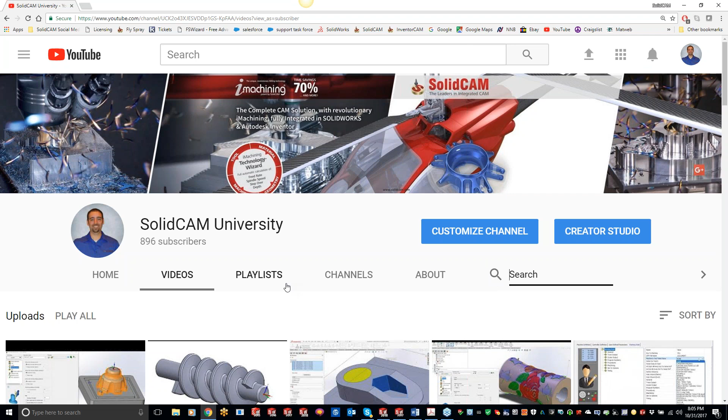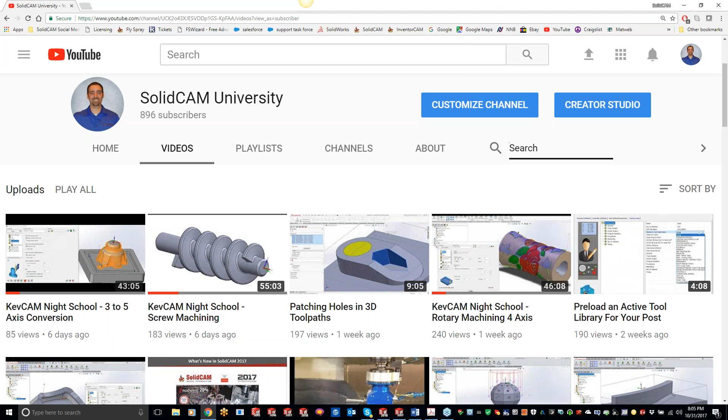But tonight we are going to be covering port machining. Port machining is a really great module, specifically designed for doing ports at funky angles. The nice thing about port machining is that it takes into factor that we're trying to get down as far as possible in here. So the 5-axis control is going to take over all the control for you guys, taking a lot of the guesswork out, and it's going to get that lollipop cutter in there as deep as it possibly can, and then we can come in from the other side and finish it off.

Now, before I get rolling too far ahead here, I want to throw this out to all you guys that are watching right now.

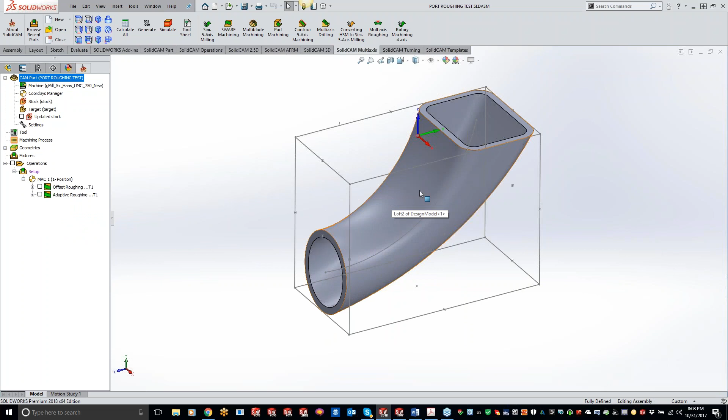To give you a good example, let me open up this file here - another port machining part. I want to show you the difference between offset cutting versus adaptive. With this one, we're doing the offset cutting right here.

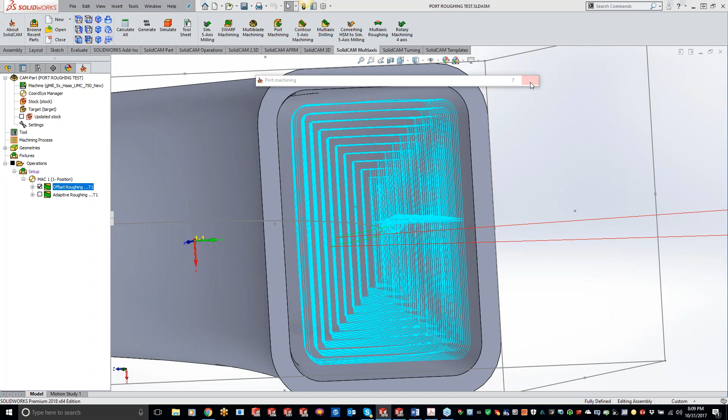If I get some straight-down toolpath view, lined up a bit for you, you can see it's doing the traditional standard pocketing - starting in the center and slowly working its way out, taking its pass, moving over, working outward like a traditional pocketing operation. Now with adaptive, there's a lot going on because we have a lot of toolpath shooting through the entire part, but you can see it's doing a spiral, starting in the center and working its way to the outside.

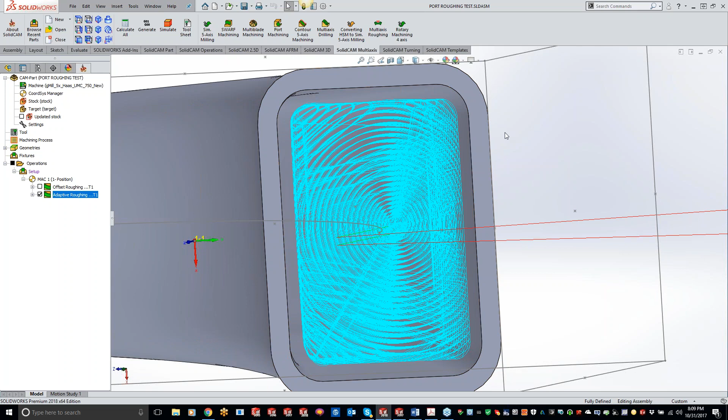What it does is factor in once it hits a higher angle of engagement, it automatically switches over to that trochoidal motion - you can see it in the corners, coming in and doing that trochoidal movement. That's the big difference between adaptive and offset cutting.

Now with the part we're running right here, our ports are actually pretty small, taking into account the size of our tool. So adaptive or offset cutting really didn't make much difference for this particular toolpath, just because we didn't have a whole lot of material given the size of the ball end mill or lollipop cutter we're using.

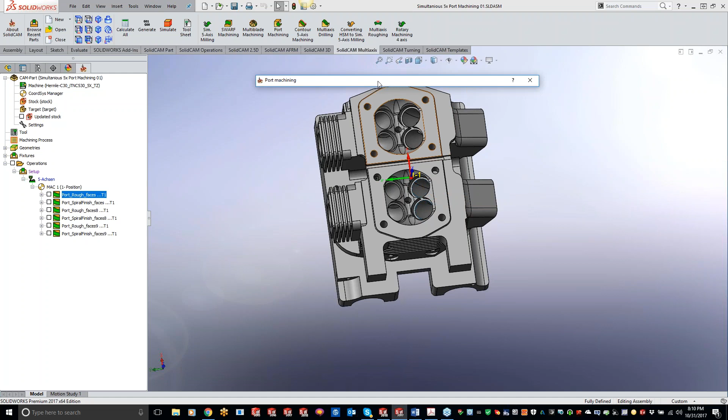So once you pick the strategy that you guys want to use, let me continue on with this. We have roughing, then we can do a rest roughing. We can start off with a larger end mill, come back and do a rest rough, and it's just going to clean up whatever the remaining stock was.

We can do a spiral finish, and we'll actually be using this one, or we can do a plunge finish. Now, the plunge finish is going to be a little bit different than what you're thinking of, just doing a kind of plunging it out, like what we've seen in pocketing.

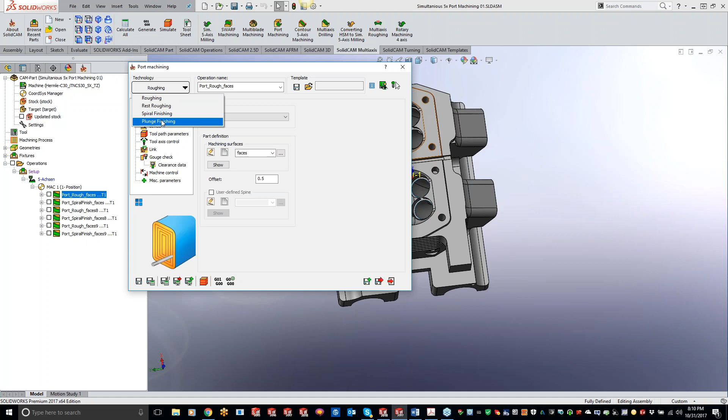I think HSM also has some plunging features. What the plunge finishing is going to do is, instead of coming in here and doing a circular pattern, it's going to do straight lines down, kind of working its way around, doing straight lines going through there.

So it's kind of more of a long contour versus going around, if that makes sense for you guys.

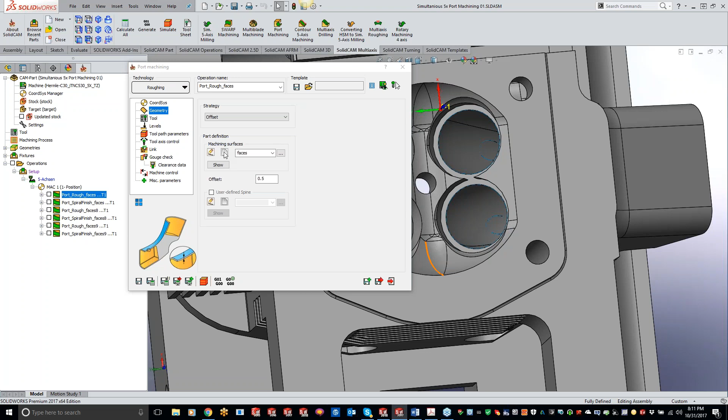Now, the machine surfaces. Think of, we've been working with HSS, we've been working with 5-axis for the last few weeks here. Think of your machine surface as your drive surface. What surfaces do you want to cut?

So for this particular one, what I actually did is broken this up into different surfaces. You can see right here, this surface actually continues all the way up. But what I wanted to do is break it up so I can get a good portion of it on this side, and then come from the top and get another good portion of it. So I just did a surface break in there.

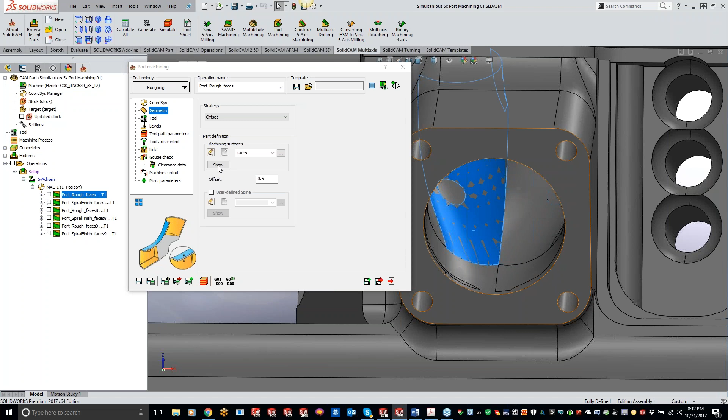If I come in here and do select other, you can see I got my surface break right there, grabbing that surface. I'm going to do a show on here for you guys, but it's a little tough to see because I got two surfaces kind of overlapping each other. So what we're working on is this area right here, as it starts to taper off, up to that section point, and then this front area face right here.

So with any roughing strategy that we do, we can put in a wall offset. This part was programmed in metric, so we got 0.5 millimeters as a wall offset, if you would, since we're using a roughing strategy.

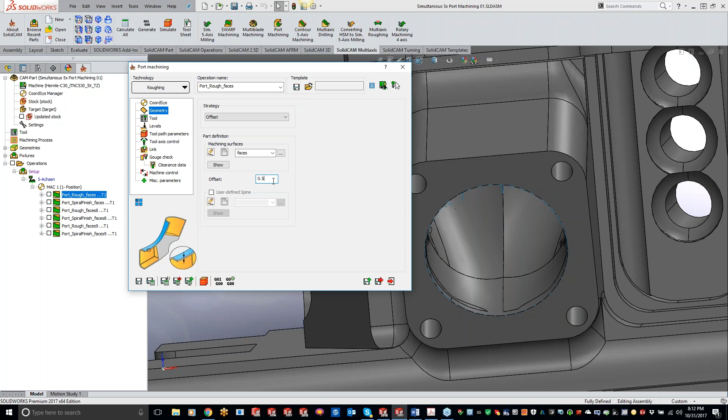Using a 16 millimeter lollipop cutter, nothing really major there. Like I said, when you guys go to select tools, you're only going to get two different options. We got a lollipop cutter and a ball nose end mill. Those are only two options in there.

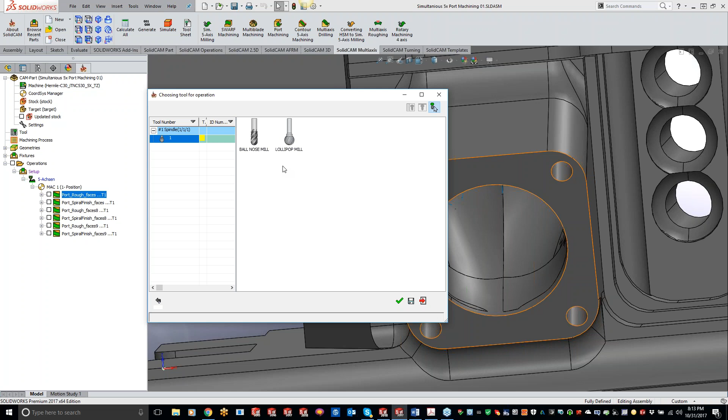I'm trying to get them to add in there the straight flute end mill just for a roughing strategy. They're trying to put that together as we speak, trying to get the ball rolling on that, just so we can have a little bit more aggressive roughing tools to get in there. But with that adaptive step over, it takes out a lot of the hard work on that cutter, especially if you're using a lollipop cutter.

Okay, levels. Same as normal, we're just doing parallel to X. Got a cylinder with a radius, so not really much we have to change in here. This is actually just default numbers that I've chosen in there.

Toolpath parameters, pretty much the same thing as what we've been seeing for the last couple months here with HSS and 5-axis. You got your step over, so we have a 5 millimeter step over. We also have a step down, so stepping down into there, we can kind of fine tune that tool path just a little bit more.

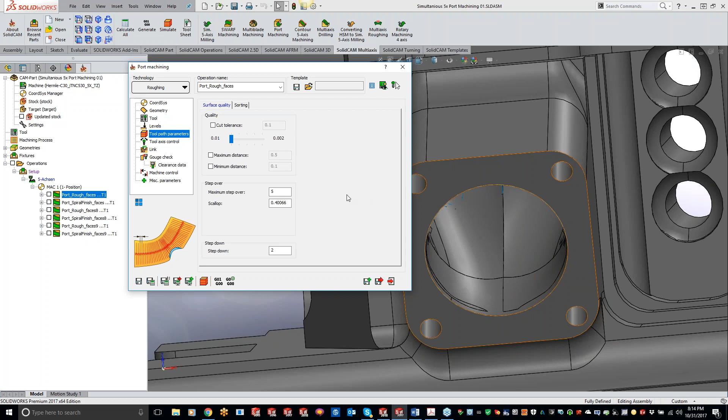Now, where we get into the good side of things is on the sorting. Let me kind of get this part panned around for you guys here. If I'm talking too fast, let me know.

So the output type, do we want to work on the bottom, which would be the bottom of that port? And it's all related off your coordinate system. If you think of up on the top is going to be your top port, and towards the bottom of the coordinate system, this is going to be your bottom port. Same thing, if I go back to this part right here, you'll see this would be the top portion of our port, and this would be the bottom portion of our port over here.

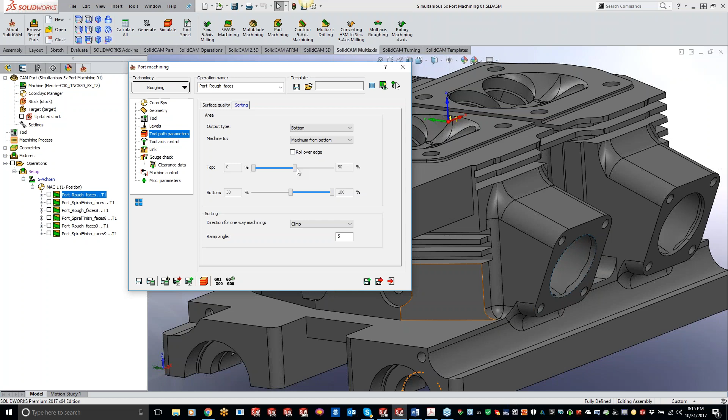So we want to start at the bottom, and so here's our different options. We can do both, from top and bottom. We can do the top, or we can do the bottom to get this bottom cleared out. You also have the option to do a rollover edge. This one honestly I've never really used before, and the only reason why is because I've told it to go 50% past my top. So as it's going in there with my little section that I sectioned off here, I'm telling it to go past that by 50%.

So with the machine to option here, I can do up to a midpoint. I can do maximum from top, so it's going to go in there as far as it possibly can without hitting the shank on the port. Or I can do the maximum from bottom, or we can do user defined, and you can just tell it how far to go in there. But for this one, we're actually going to do maximum from bottom right here. We got your cut direction. You guys can put a ramp angle in there if you want.

Now, I hate to do this, but completely switching tracks right here. For those of you guys that use simple 2D profile, when you use the helical feature in there, you'll notice that we just have a step down. We don't have an actual ramp angle. Would you guys like to see the option for a ramp angle or a step down value? This came up end of last week, and I've turned it in, and they've asked if customers would like that or just leave it the way it is. So I got a couple of yeses in there.

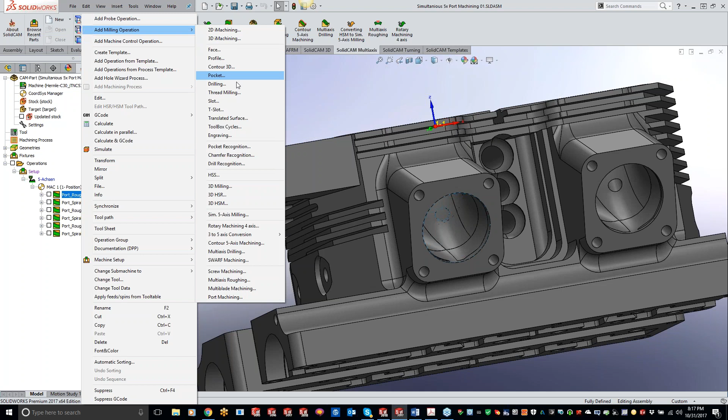So like I said, I apologize, this is completely off subject here, but for those of you that are curious what I'm talking about, let me just add a profile operation. If we go to technology, you can do a helical option right here. And then the only way to set the helical is the step down. So if you do 100 thou, for every revolution it's going to go down 100 thou, but you have no control over the angle. So what we're thinking about adding in here is a little checkbox to do an angle instead of a step down.

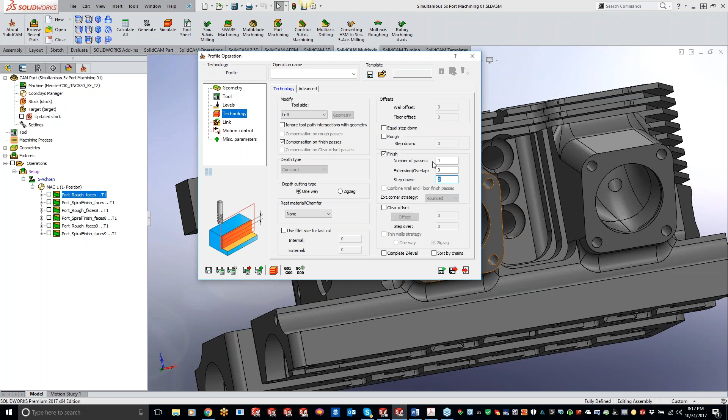So yes. Okay, I got quite a few yeses in here, so we will get those added in there for you guys. And I'll even add a yes to the vote there. It sounds like a nice option to add. Yeah, and like I said, guys, we want to make SolidCAM the best use for you guys. This came up from a customer. Want to get that implemented, and want your feedback on that too. So we will be adding that in there.

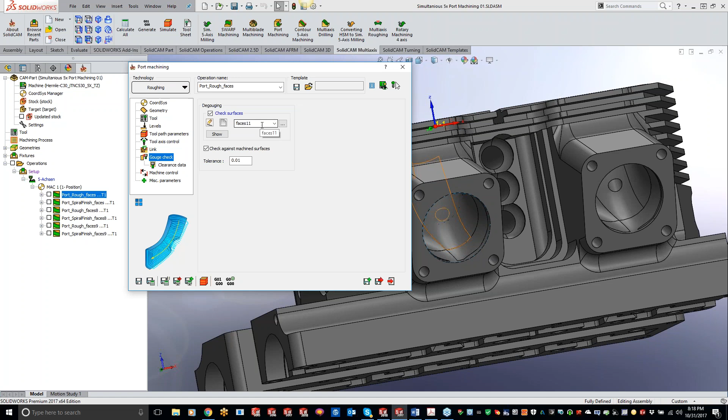Okay, so we were under the sorting. So I'm telling it to start at the bottom, go maximum that I possibly can from the bottom. Tool axis control, not much in here at all. It's taking all the guesswork out for you, and it's basically going to keep that tool in there so it's not going to gouge against the wall. And that's where we come into the gouge check here. I'm telling it to not gouge into any of the faces, but I can also do check surfaces. If I do check surfaces, I'm telling it not to go into these surface areas up here, because I want to come back and attack that from the top side.

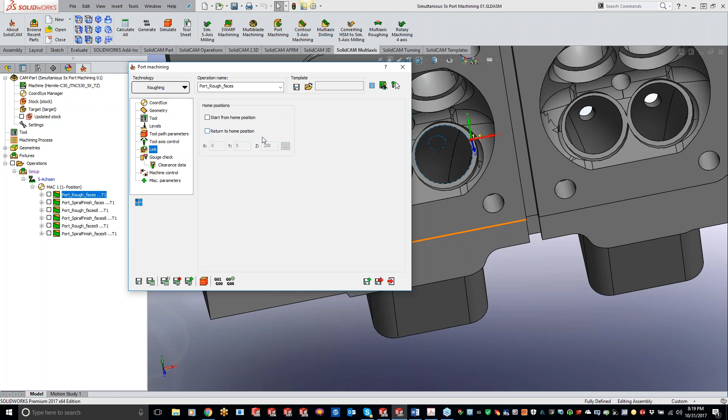And then I can put a tolerance in there. But even with this turned off, it's still going to look at the shank of your tool and what you're cutting with to make sure that we can get as far in that port as absolutely possible. I did skip over the linking, just not much in here at all. We can do start from home position or return to home position, but that's about it.

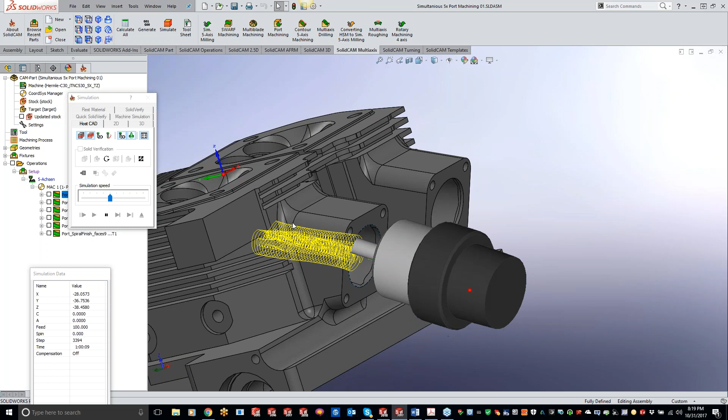So let's see what this looks like here. I'll just do a 3D tool here with the host CAD, and we'll slow it down. So just roughing it out, and you'll see it's going to get in there absolutely as far as possible without gouging that shank or hitting any gouging surfaces all the way through there. Let me play this through Solid Verify. We can see that tool rocking around a little bit more in there.

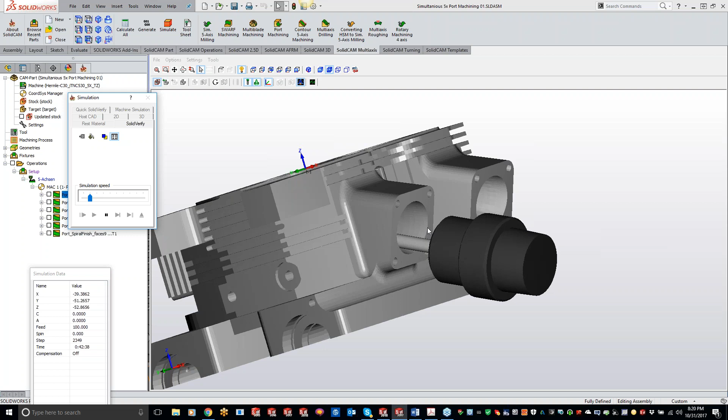All right, so let's play this through here. As we're going straight in there, we're not doing much angular rotation, but as we get deeper in there, let me slow it down a little bit, you can see the tool wiggling around with that lollipop cutter. Let me turn off my holder for you guys. There's a good view. So keeping that tool holder away, getting as deep as possible in there.

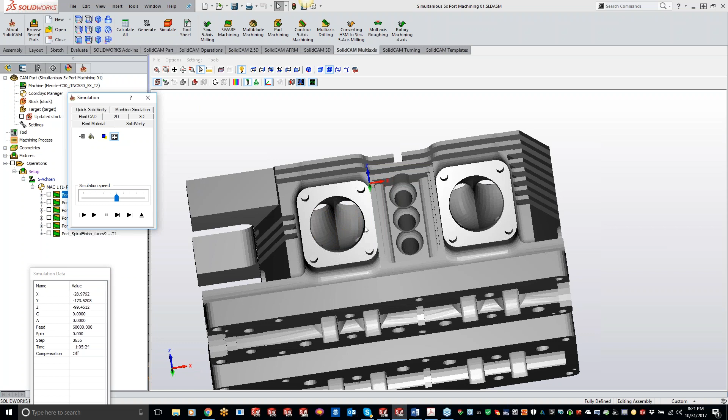And you can see the deeper it gets in there, the more it's doing the 5-axis head rotation to get that tool as deep as possible. Okay, so that's it for that front port.

We have a fairly large part here. And it takes one entire pass going around and does a gouge check. But, well, let's just do it. Shouldn't take too long.

Now, with that being said, Tim, I guess I'm going to push this one on you a little bit. If you have simultaneous 5-axis, is port machining with that, or is that an additional module that comes with it, or how do we have that set up? I'm about 10 seconds behind you in being able to answer that, because as I was watching what you were doing, I thought, I'm going to do a little investigating on the backside.

But yes, what you're actually using is the port machining module, which is not included with any of our packages. It is an entirely separate, standalone add-on module. So even if you have 5-axis Pro, this is something they added about 1.5 years ago, if I'm right on the timing. But the simultaneous 5-axis port machining module is sold independently of any package. Gotcha. So hopefully Jason knew that one already too. You must have checked on it already.

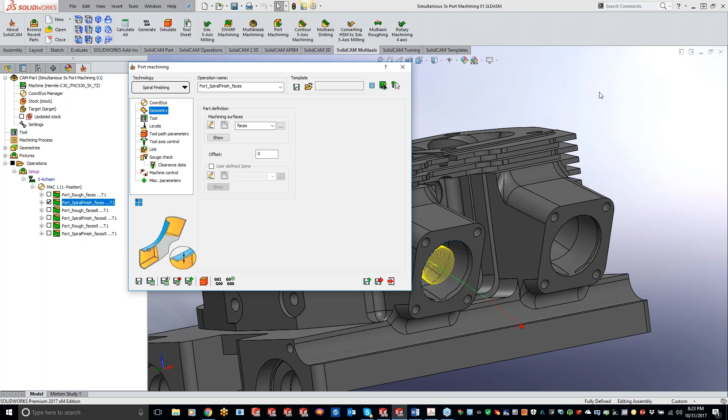Awesome. Okay, so you can see it didn't take too long to do that calculation, but I switched over my offset to 0. Another thing I did is I switched my step over. Instead of doing 5 millimeters, I am now doing 1 millimeter step over. So if we get a straight down shot in here, doing a nice spiral, starting from the center, and then it comes in there, arcs in, and then just does a nice spiral pattern going around. So simple, easy to use for the most part.

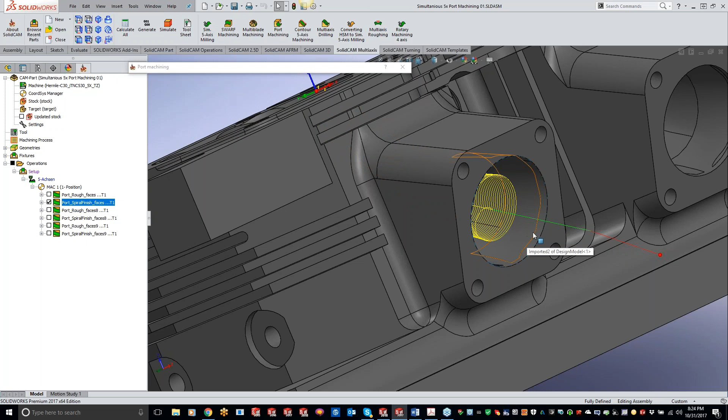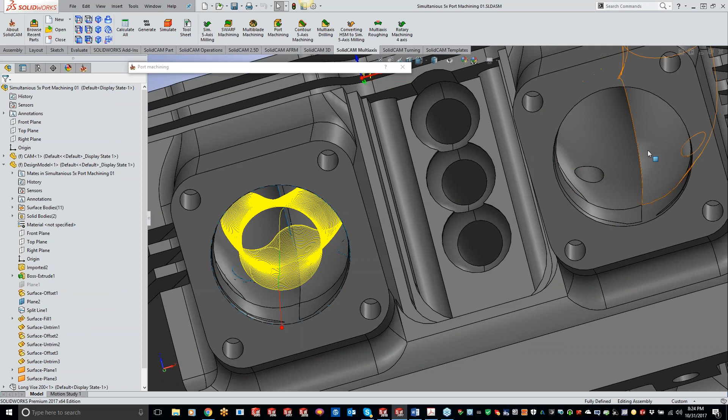The biggest thing I found programming this part is depending on the model. Now, this part was sent over as an import. So I had to do a couple fill surfaces, and on this part right here, I had a hole in there that I just wanted to fill up, so I wasn't catching that, and then I just wanted to create a break in there. So you won't find this part anywhere, but if you guys would like this part for an example, let me know. I'll send it over to you.

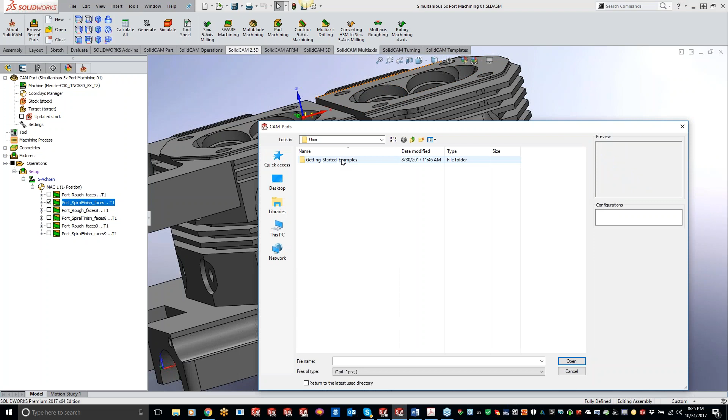If you go to your tools, SolidCAM, let me get out of this operation here. Under the Getting Started Examples, there is a port machining part that is similar, a little bit different, and they use a little bit different toolpath, so you can also use this one as a reference for those guys that wanted to know more about it.

Okay. And prior to us coming up with the port module by itself, you can do 5-axis machining and get ports machined. Oh, absolutely. But the port machining module is a much cleaner, easier way to get it done. So that's the benefit and why they added it. Yeah, and Jason's agreeing. It actually comes from customer requests, and that's why we came up with the port machining and the multi-blade machining.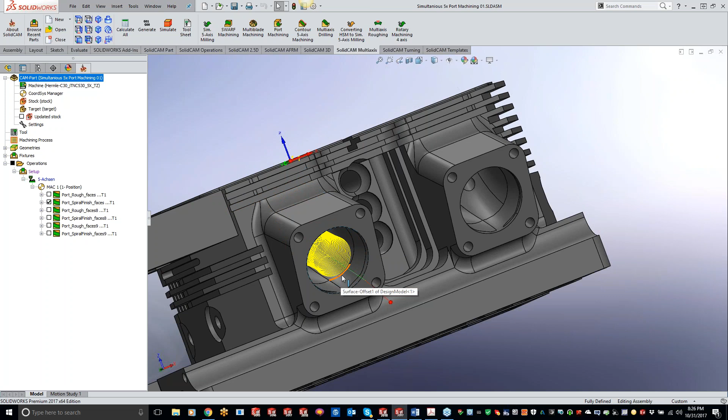As we're coming in the spiral face here, if we were doing 5-axis, we'd really have to play a lot with the tool axis control, lead and lag angles, following, ISO lines, all that stuff, where this takes all the guesswork out for you guys. So, okay, any questions on the front port right here? Got a nice roughing and finishing there. I don't see anything popping up. Okay, so now let's start on the top side of things.

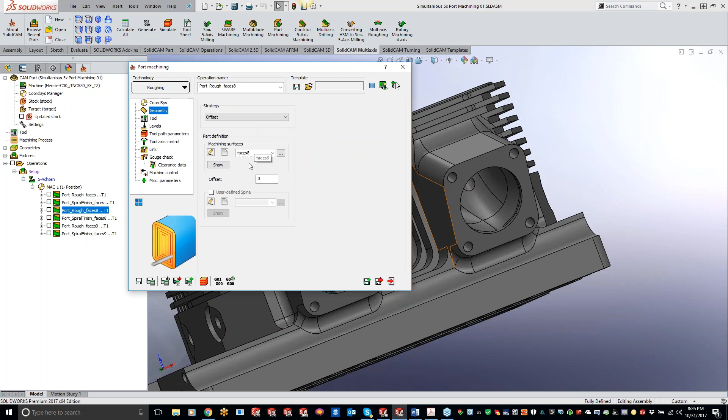So we're going to do our machining surfaces, just doing offset strategy here. And we're working on the left port right here. So I told it to go down to there. Using the same cutter, 16 millimeter ball end mill. Levels, not going to worry about. Toolpath parameters, doing a max step over of 3 in there. A little bit different. I could switch that back over to 5, but just doing a step over of 3 for right now.

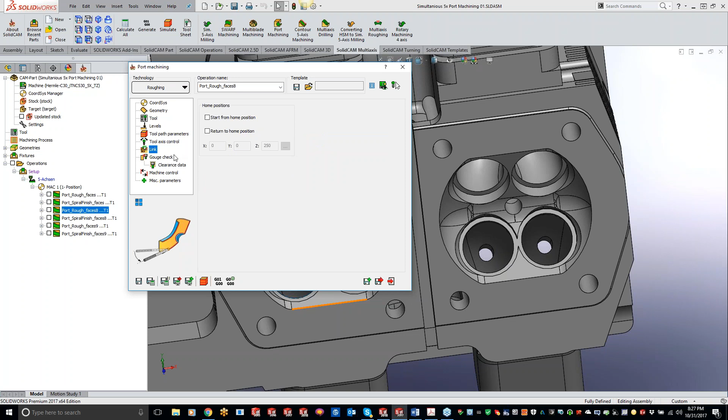Now, what I switched is starting from the top, and then I want to go down absolute maximum as possible from the top. So it's going to try to go in there as deep as possible, coming from the top, shooting its way down. Like we talked about, tool axis control, not much in here. Linking, not much in here also, just because a lot of this stuff is all implemented automatically. And then just did a gouge check against that surface that we basically just cut prior.

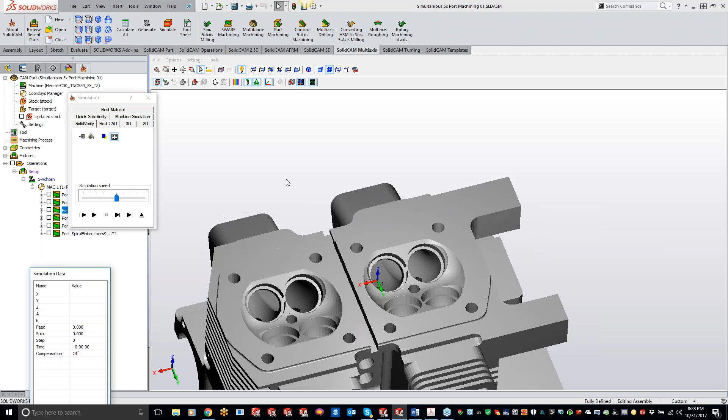So got these surfaces in here selected. Hopefully everybody can kind of see that. It's kind of hard to see. It's a blue and gray shaded there, but okay. So we got everything roughed out here. Let's take a peek. Okay, kind of get a decent view for you guys here. Play it through.

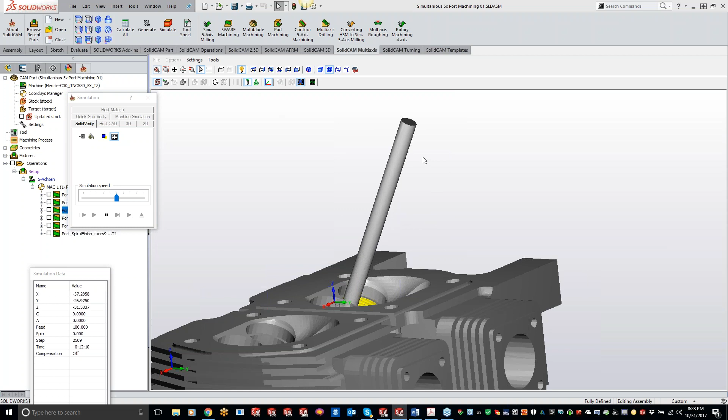Like I said, that initial first part, we're not going to see a whole lot of the 5-axis head moving around or the trunnion moving around, but as we get deeper in there, let me do a top-down view for you guys. You can see what's really going on down there. And really it gets close with that shank, but it knows that it cannot touch it. So speed it up here a little bit. So getting down there as far as possible that we can get at.

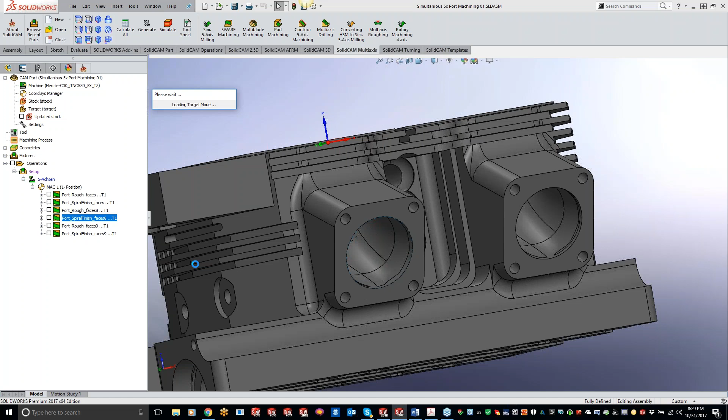So like I said before, all we have to do is do a save and copy. Switch it over to spiral finish here. Got it offset at 0. Let me just check my toolpath parameters. So we got it set at 1 millimeter step down. Kept everything top. Do the maximum for top. Simulate this here. We should get a nice toolpath going through here. Let me turn off the holder for you guys.

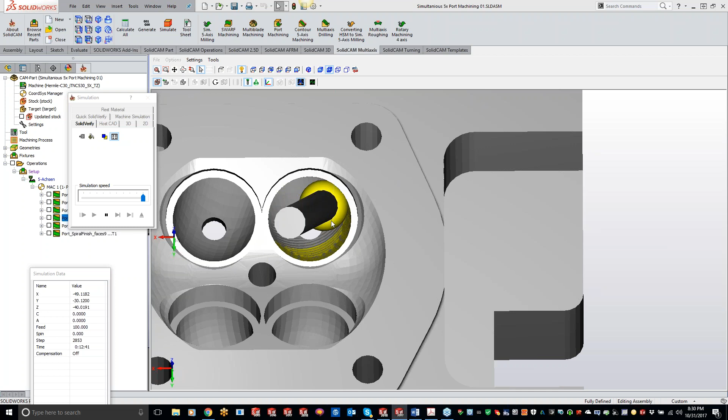Now, one thing I tried doing is, since we got this cylinder head right here, my thinking is, since we have everything lined up, I could just do a mirror toolpath over here. But it doesn't look like it's quite working like it should. I tried everything in my power to get it to mirror over, and my plan was to mirror these toolpaths over to the opposite side, and then we could just do a transform. We're only doing a 2-cylinder here, but if you guys are running 4 cylinders for a V8, that would be real helpful.

But as of right now, unfortunately, we would have to program this side too, but all we have to do is just do a save and copy and then grab those surfaces that we needed. Then we could do a transform once we have all 4 of these done and transform it over cylinder to cylinder. So that's something that I'm going to bring up to the guys and see if they can get that added in there. And just finishing up here. Okay.

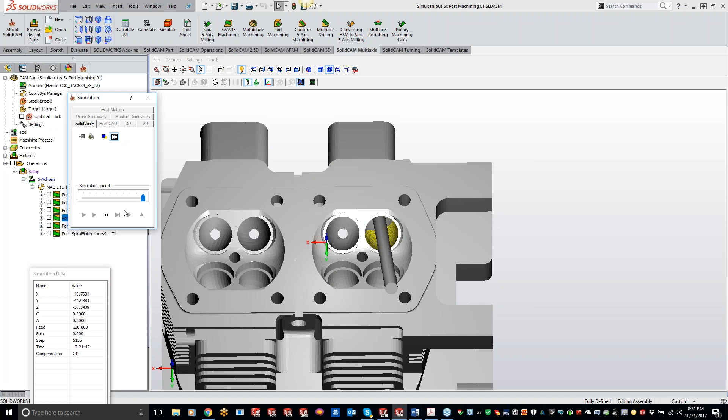And Kevin, we got a question here about the machine control. Oh, okay. So machine control is more dependent on the post processor. And we covered this a little bit with the 5-axis here. You guys can set it up. I don't have a machine set up for this Hermle machine right now. But right now I have no limits on. Now, if you needed to set up rotational limits for your indexer, or allowing your head to rewind or unwind, here's where you go to set those up.

So you have machine limits right here, and then you also have your start angle type. We can provide second angle, and I don't know a whole lot. Maybe I should just do a quick video tomorrow explaining what the start angle ones are here. I don't know a whole lot just because it's so dependent on your post processor what we pick here. But we can choose between two solutions, provide first angle, second angle, and you can also set up a value for the angle there.

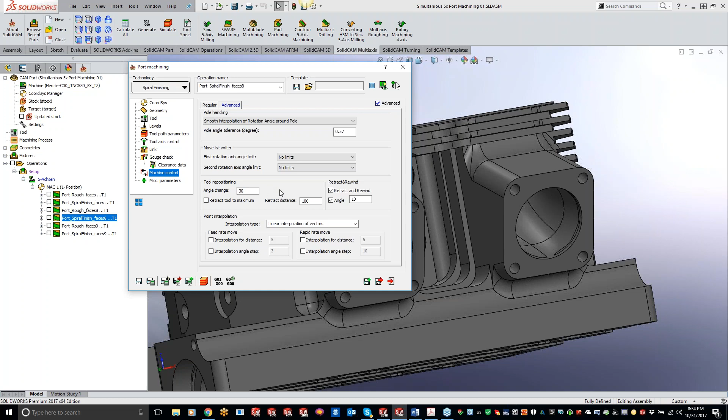So if that helps you, Jason, we'll get that tweaked in there for you. But I know some of it in here, I just don't know all of it, and I don't want to give you guys a wrong answer. And Kevin, I don't know if you could see Jason's comment there. He's primarily looking for the pole options under the advanced tab. Yep. Yeah, there's a lot in here underneath the advanced tab.

Are the post processor guys actually populating that pull down list, or is that core from the software? It's actually kind of correlating with the VMID. So based off of the VMID of rotations, and what the machine limits are, is kind of what's populated in here. Now, Jason, when you're using port machining, are you coming in here and having to change a lot of this stuff? Only pole positions. Okay, so right here, rotation angle around pole.

Yeah, I kind of completely overlooked the machine controls when I was getting ready for this class. So like I said, we'll dig into this and get you guys a 100% for sure answer on the pole handling. And we'll also cover the move list writer, so we can set up no limits. This is being pulled from the machine limits right here. But I'll get you more information on that. I was under the impression that a lot of the stuff in here by default is good a majority of the time, but we'll get it figured out.

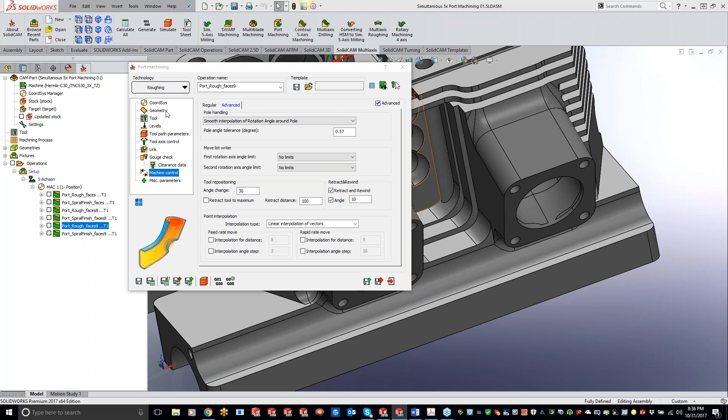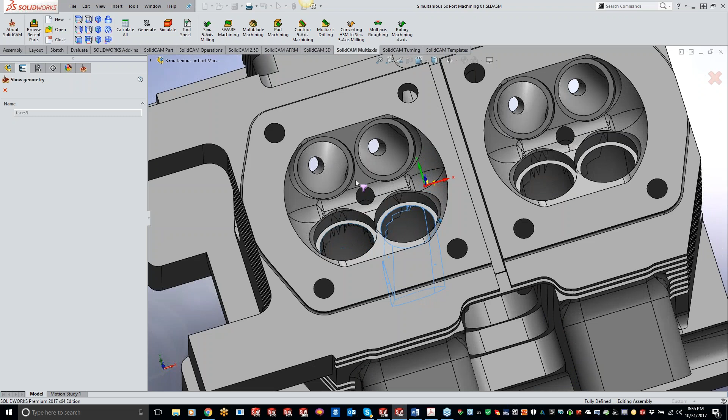Okay, so now the only one we really have left here is the right side port. Let me do a show here, rotate around, and just doing the right side. Pretty much the exact same thing over here. I could have almost just done a transform, transforming it over with a distance, but from my understanding with engines, an exhaust port and intake port are usually going to be just a hair different in size. So we got a separate operation for it, using the same cutter, using the offset method.

Levels kind of keeping the same. Toolpath parameters, stepping over every 3 millimeters here. Same thing, starting at the top, and I want to go down as deep as possible. And then the gouge check, pretty much the same as what we've done before. And then the last one is just finishing up using that spiral finish, with an offset of 0 in there. Toolpath parameters, set up so it's going down every 1 millimeter.

Jason, since you've used this quite a bit on the machine, what are you noticing for step overs to get a decent finish with these ports? I know with engine building, the smoother you have it, the better performance you're going to get. But I know they have honing tools that they come down in there, so just kind of curious what you guys use for scallop.

I'll let him write in if he has anything.

And then sorting, like I said, pretty much all I did is just did a save and copy right here. These are pretty helpful too. If I'm over here, I can see that it's just trying to work on the top. If I click both, it's going to try to squeeze down and get down as far as, oops, thought I had it both. It's going to try to get down and through as deep as absolutely possible for you guys. And then if we're just trying to work on the bottom here, it's just going to try to work on that bottom half, getting up as high as possible.

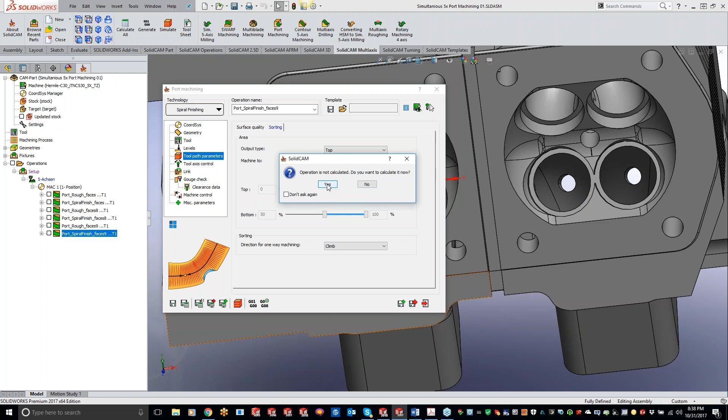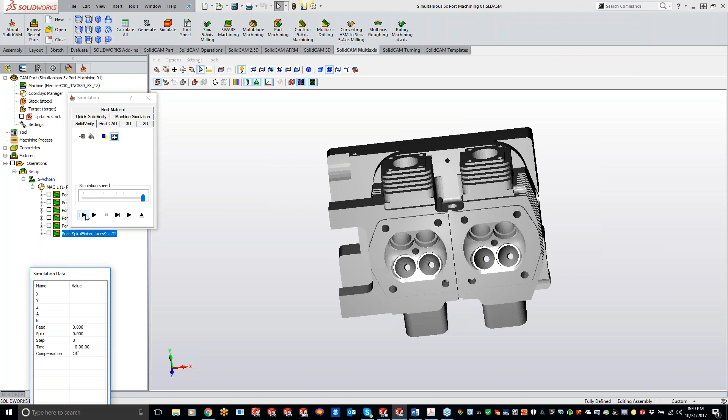Now, I don't know if you guys knew this. I don't know if it's just a default install or a new install, but it seems like a lot of these parts are coming in under hybrid mode. That's going to give you a transparent look, and we can change our transparency in the visual properties right here. But one real quick way to switch back and forth is just switch it back over to render mode, and that's going to give you back a solid model.

Now it looks like this one I'm not getting any transparency on, but it seems like with that hybrid, it throws off a little bit, just not a fan of it. So I like to see a solid model. So if you guys don't want to have to go in and change your settings, change the visual properties, take out the transparency portion of it, you guys can just click over onto this button right here too. So hopefully I'm getting a decent angle for you guys to see how that tool is really working around inside there, keeping that shaft away from that valve seat right there.

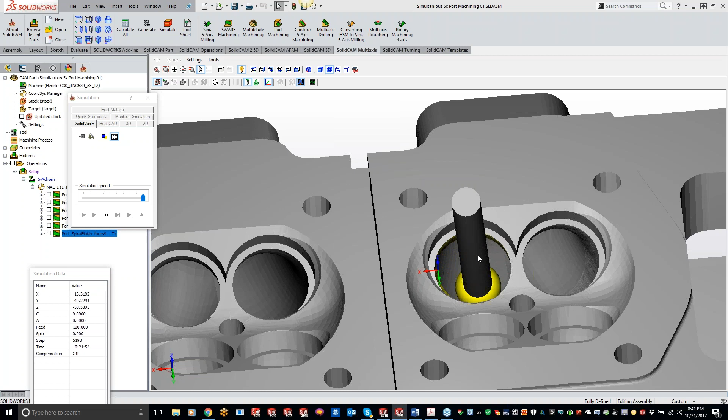That's about it for port machining, guys. Do we have any other questions other than the advanced under the machine controls? Any questions on how it works? Anything else you guys wanted to see?

I didn't do any rest roughing on this particular one, and I also didn't do a plunge finish, just because I wanted to get this part as realistic as possible, and I think for something like this, I don't see a need for using the plunge method. You can see what it's doing right here. It's just doing the long lines going around instead of doing circular lines going around.

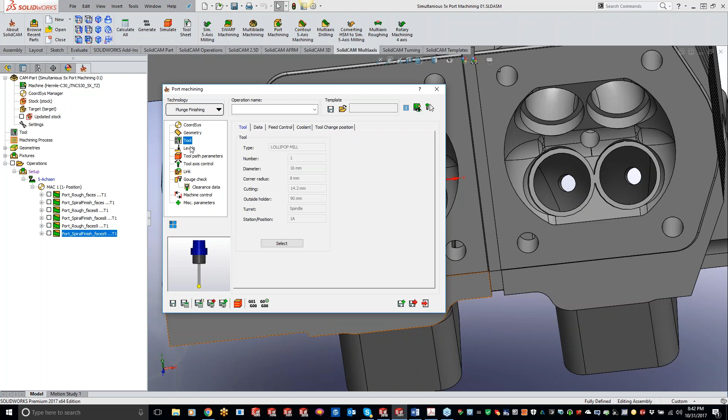Yeah, any questions, guys? Any concerns? Anything else you guys wanted to see? Everybody eating their kids' candy right now? No, I don't see anything popping up.

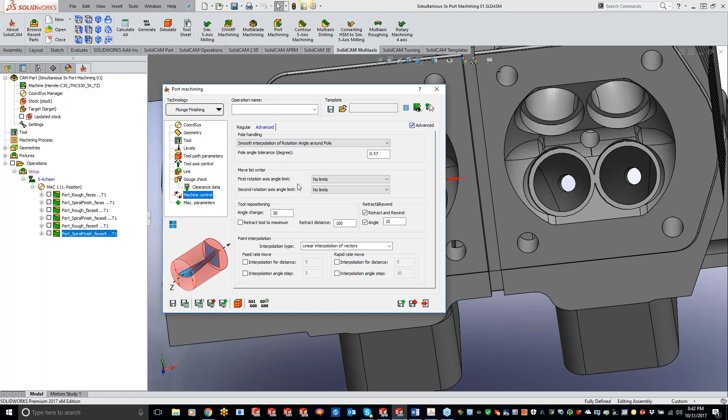And then to go over the machine controls in the advanced area here, we'll just make a separate shorter video explaining what each one of these do. I'll have to do a little bit of digging and investigation and find out what these do for you guys, and the best way to set this up, in a more advanced port machining video. And then miscellaneous parameters is just going to be your miscellaneous M00 stuff in there.

But yeah, Tim, you got anything else to add? I can't think of anything from my side. I haven't had a chance to really see this port machining stuff, and looking at it as an add-on module, it's kind of difficult to discuss. You got customers who actually do this type of work all the time, but they're using the traditional style of 5-axis toolpath. It's nice to see a video here that shows the shorter workflow, not having to go through all those options.

Sure. Now, let me just do this. Jason, I'm going to put you on the spot a little bit here. The port machining that you use it for, was it worth the additional add-on?

I must say it's a blessing. Okay, so that answers that question.

Thanks, Jason. So for those of you guys on the fence about it, or thinking about getting it, or don't have it and want to try it out, let us know, let your account managers know. We can let you try it out for 30 days and see what you think, try it out on your parts, and it might help out.

Or if you guys are unsure of it, what we can do too is contact your account manager, tell them you want to see a demo, and we'll do a full-on demo with one of your parts, showing how it will benefit you, taking it from doing 5-axis to switching over to port machining, and how much easier and time savings it's going to save you in the long run.

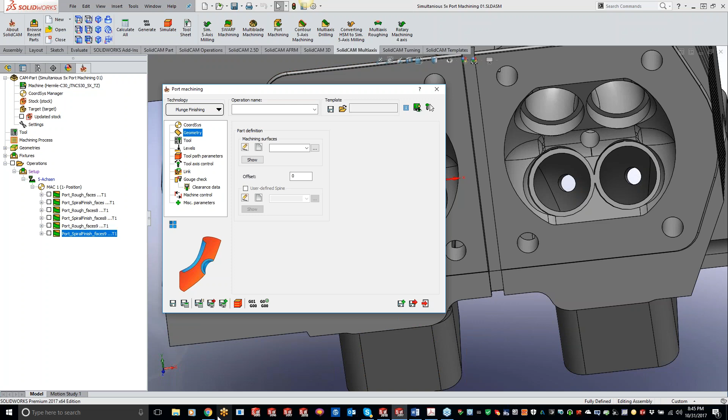Next week we'll be doing the multi-blade functionality. This is another specific module just for doing turbine blades. It takes out a lot of the hard work - I know Justin did do a turbine blade using the simultaneous 5-axis, but now we're going to show you how easy it is to use the multi-blade functionality.